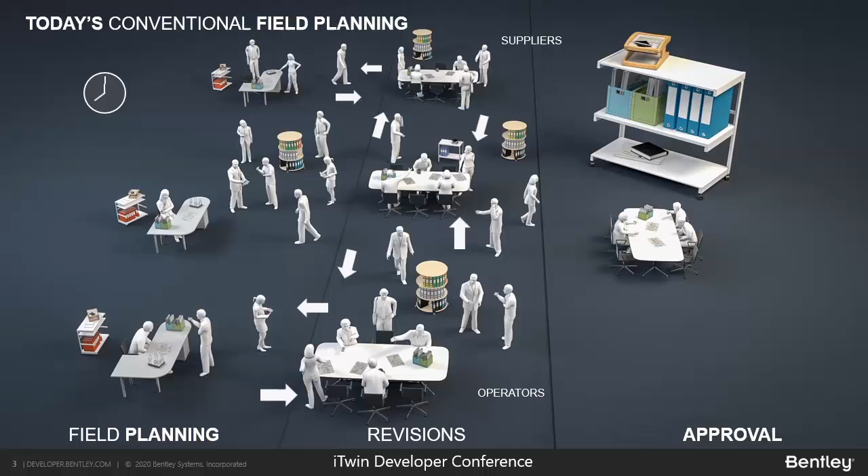Because when we work with our clients in the conventional field planning process, we saw that a lot of meetings are held. A lot of data goes in the form of email attachments, you print them out, you make revisions, you edit them, you meet again. And the time until the approval phase is long.

So what if there was a better way to do that? What if you didn't have to spend two-thirds of your time just gathering data and making sure you have the right data to make decisions? What if you actually could have a collaborative digital way of doing this, to do a much more efficient field planning for any sort of energy project, where the domain experts and the project owners can work together on the same data set and fast track this to the approval phase?

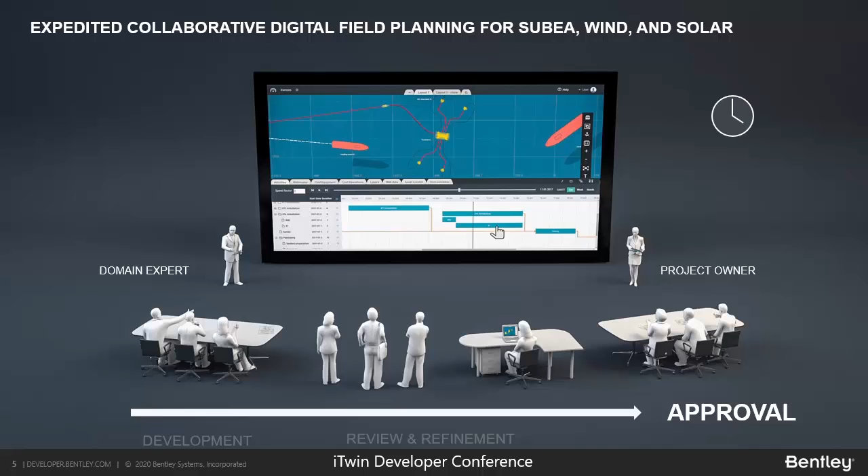And with data always updated and always accessible anywhere at any time, this becomes much more efficient. And if the same data set can also be shared between the different partners in the ecosystem—operators, engineering companies, marine installers, platform contractors—what if they all can collaborate on the same data set to make it much more efficient? So I thought I'd show you a little video on how this works.

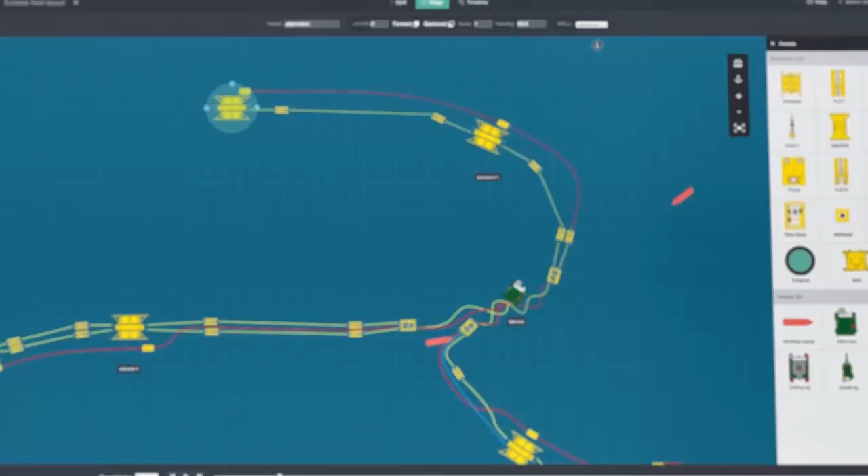So what is FieldTwin? Well, FieldTwin is both software as a service and platform as a service. We're completely cloud agnostic and completely container based. We run in your browser, so there's no installation to be done, and we offer our service on the SaaS side as both a multi and single tenant service. It's available around the clock, around the year. It's very secure, scalable, and reliable. And everything we do is based on open standards, powered by our REST API.

So this is a data-driven design platform, because as I mentioned, data is key for FutureOn. And at the heart is the digital FieldTwin model. This is a generic network topology domain model of your field. Typically this is comprised of descriptions and data storage for pipelines, assets, 3D surfaces, well data, cost data, but also our extensible metadata model that allows you to grow and enrich this model over the life of the field, which can be 20 to 50 years maybe.

So you typically start out by ingesting data. Seabed data, bathymetry or survey data gets ingested and converted into a digital elevation model. You then design your layout using our generic asset library, or if you have your own asset library, you can use that as well. You place out your topside assets and vessels and connect them. You add reservoir scans, you add the well paths, and you can also integrate directly with sensor IoT data if you like.

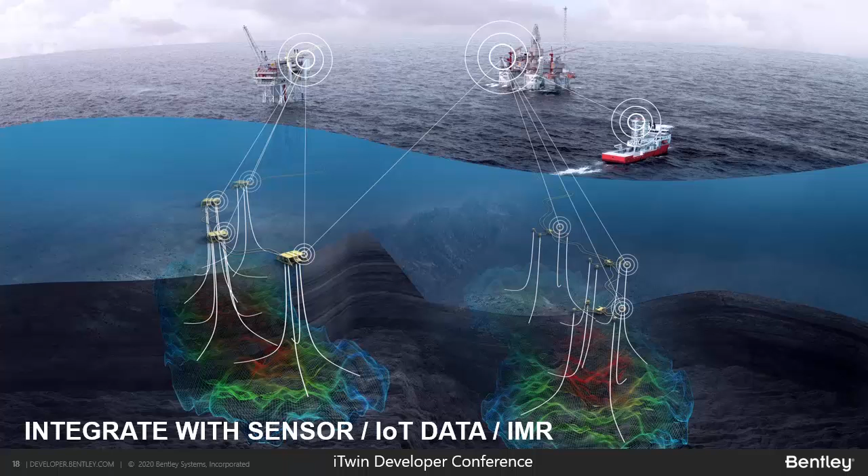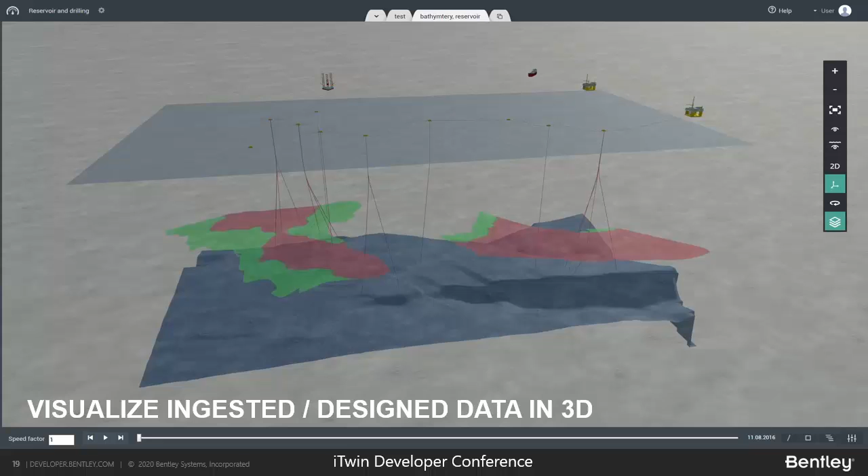And once you've done all this data ingestion, you actually have the design data shown in 2D and in 3D. This is data we got from Equinor, from the Tyrihans field, and from we received the data to it was live and accessible around the world to permitted users, it was 40 minutes. And now everyone could see what was going on from all the different expert domains and collaborate on the same model. And this goes for any sort of energy project, whether it be offshore wind, or it could be solar, or it could be onshore projects.

So metadata, this is another key element. This is where you make the engineering descriptions for what you need in your project. So typically that would be describing the pipelines, it could be the materials, it could be the fluids, it could be cost related. So as you do your design, it updates the costs and also have all the attributes needed to later on run calculations, simulations, analytics as a service, connecting with the platform through the API. And having a single source of truth makes for decision making so much better.

And as you then follow the different phases of the life cycle of the field, which is maybe 30 to 50 years, this data model, this digital field twin grows over time and gets enriched and can follow you all the way to shutdown of the project, the plug and abandonment phase.

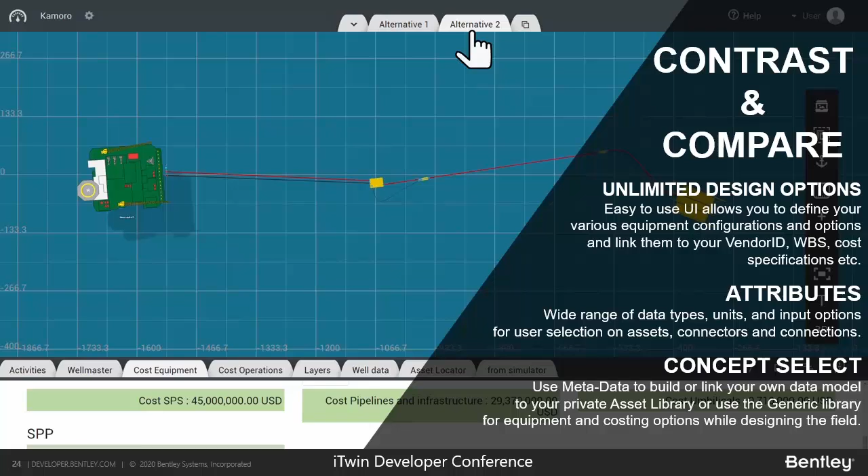One of the key strengths of Field Activity Planner, which runs on FieldTwin, is the ability to create numerous layouts, different concepts if you like. And then you can contrast and compare the cost of these concepts, the CAPEX, the OPEX, or installation time, all to help you narrow that down to maybe one or two concepts that you want to then run engineering calculations, going from pre-engineering to engineered.

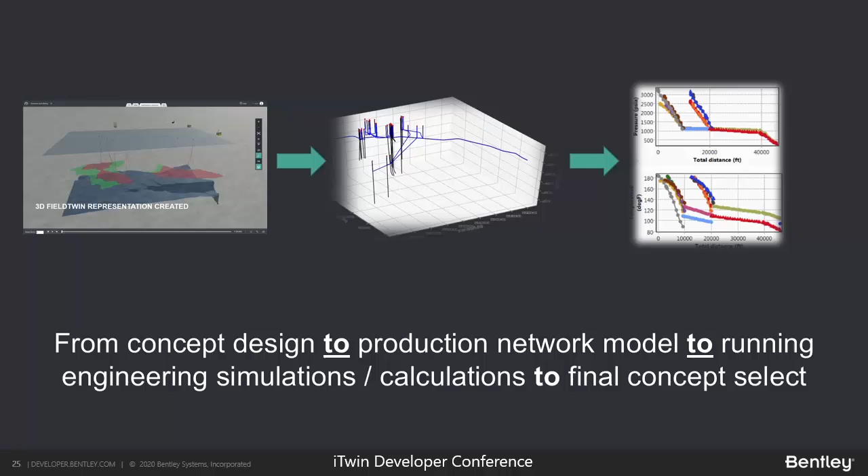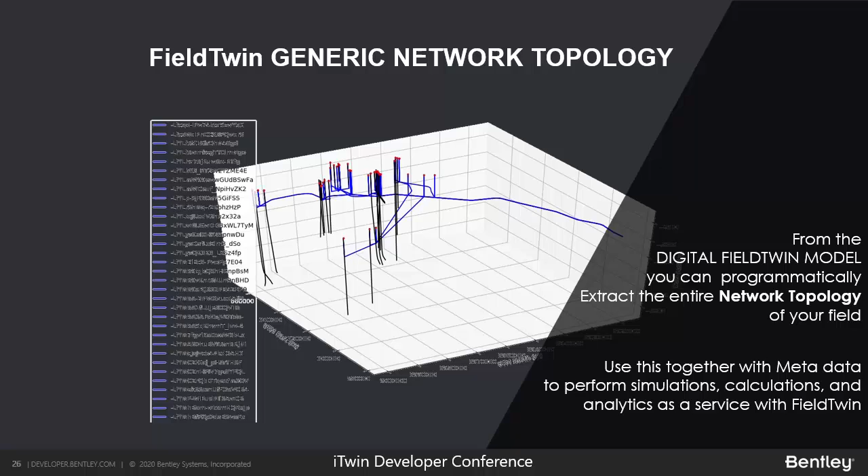And that means concept design, getting you the production network model, and running engineering simulation and calculations, and doing the final concept select. Because at heart, this is a generic network topology that you can access programmatically, and you can integrate all sorts of engineering packages with it. Because we have an API-first architecture, so everything is described in the FieldTwin model and can then be connected to other expert systems. And the API can deal with map sources, sensor data, engineering integration, simulations, backend system, calculations, costing.

But really what's important is also the connectivity with digital twins. So, as I mentioned, everything is accessible through the REST API. You can add, remove, edit metadata. You can actually create or retrieve entire field layouts programmatically using the API. You can get the pipeline and engineering data for the pipeline and run engineering calculations. And most importantly, everything is seamlessly synchronizable with iTwin.

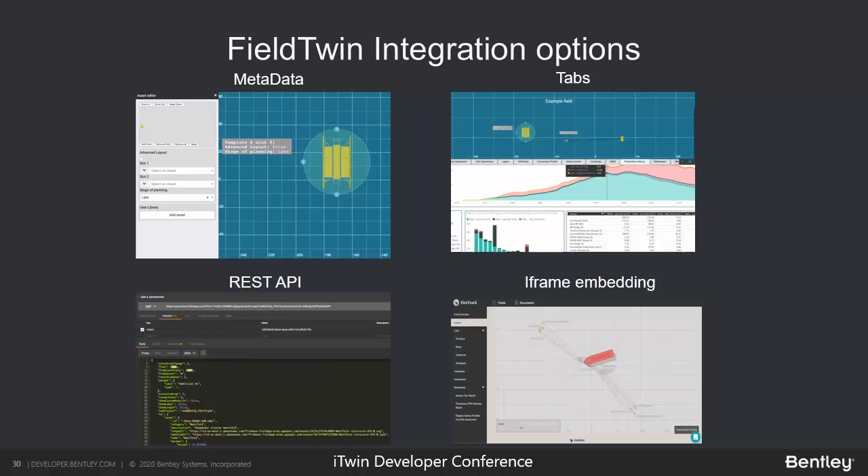So within FieldTwin, you can also embed any sort of tab, which is an iframe, so you can have your KPI dashboard from Power BI. You can also take FieldTwin layouts and embed directly as an iframe in your own applications, or just build on top of our API and create your own solutions with their own UI.

And when it comes to the FieldTwin and iTwin synchronization, this is very powerful because we can ingest a lot of the data used in the energy field layout to get to the design and concept select. In the concept design, you can hook up all sorts of calculators, simulators, engineering services, and then the synchronization brings all this data into the digital twin and enable iTwin workflows.

So that means you have enterprise workflows for review, validation, insights, and any sort of dashboard that you might need. So this enables collaboration across the board, knowledge sharing, better quality of the communication, speeds up the process, has better quality on coordination, and has a digital working environment for everyone. And that means substantial cost savings and reduced time to market, and also better risk management. And again, improved engineering performance also means that you have increased field profitability.

And together, FieldTwin and iTwin, using the iModel bridge, allows this synchronized digital energy domain models for rapid visual iTwin enterprise workflows. Thank you so much for listening.

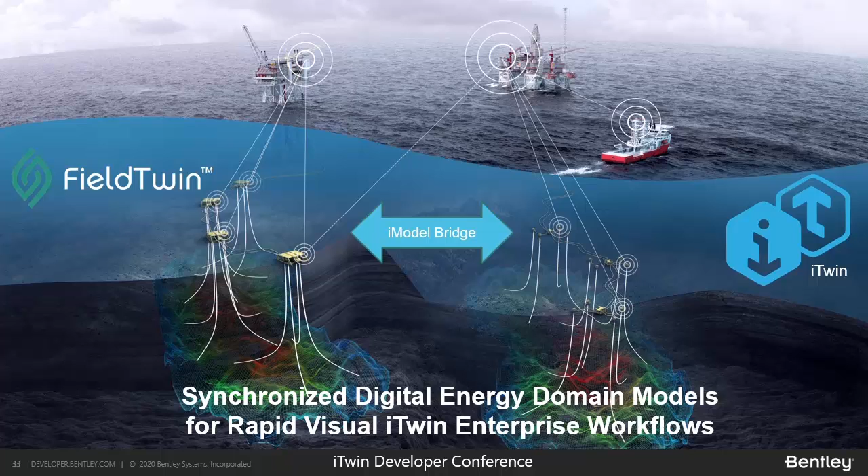We've extracted a 1-minute snippet of Josh's talk to present here for two reasons. First, it makes a great exclamation point to Olav's presentation, letting you hear about the benefits of using FieldTwin with iTwin from an owner-operator's perspective. Secondly, Josh's video showing FutureOn's FieldAP to create design concepts and Bentley's Design Insights to perform cost analysis against them is an ideal lead-in to the next two segments of our presentation, where two developers who worked on the FutureOn connector will shed more light on how that connector works.

Here's Josh. So how much time?

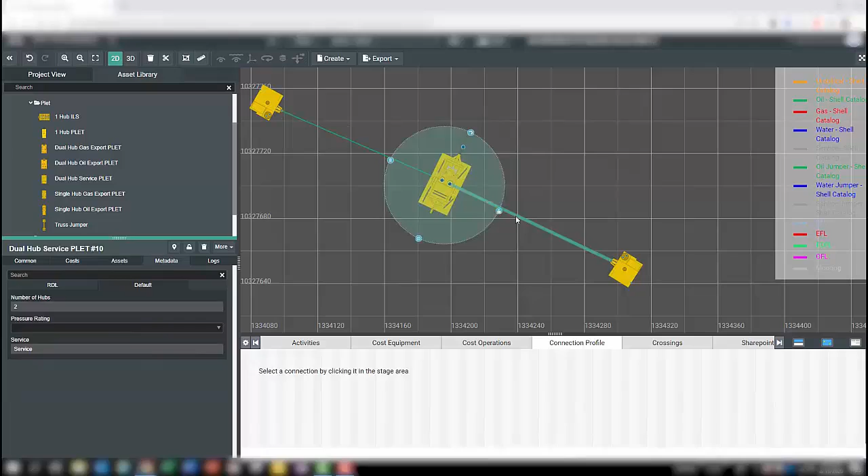We're looking to trigger a roughly 30% reduction in the amount of time it takes us to come up with concepts, select them, and move into the engineering phase. A concept engineer can now take a concept and rough it up in 3 dimensions within this platform, and they can do 2, 3, 6, 10 different concepts within a couple of minutes, as quickly as they could drawing it on a whiteboard or mocking it up on a PowerPoint slide.

The magical aspect of this is that now all of the cost and schedule data is connected to those standard engineering packages in 3 dimensions. So with the click of a button, we're able to identify, calculate, and visualize how all of those different solutions stack up against one another. You'll have professional looking waterfall charts that show the cost and schedule comparisons, and that makes the concept selection process quite simple. What used to take us months to do can now be done live.

Thanks to Josh Etkin and Shell for sharing that demonstration with us. As you saw there, multiple concepts produced in FutureOn's FieldAP browser client became accessible in Bentley's iTwin. Once there, Josh showed the cost evaluation being done using the concept compare feature of Bentley's Design Insights.

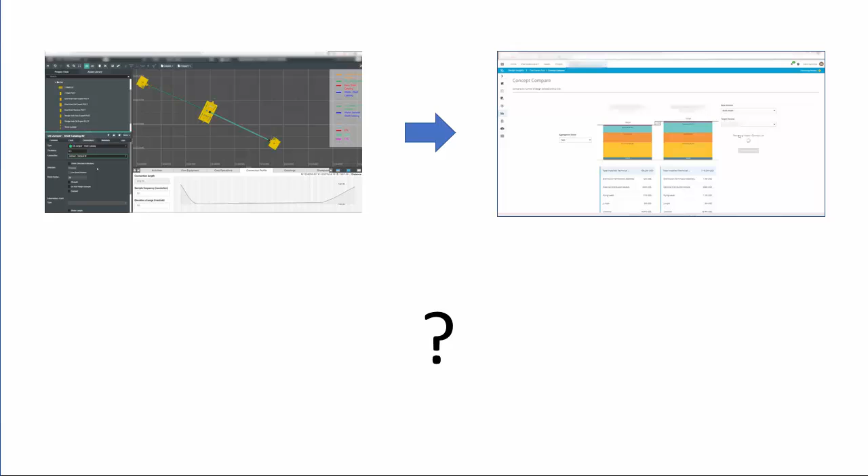But one point that the video glossed over was at what point do the FieldAP concepts actually flow from the FieldTwin over to the iTwin? How is that accomplished? In the next two short segments, Adam McCarthy and Akshay Madhukar will explain when the concept data flows to the iTwin, and once there, cover a few additional things that can be done with it.

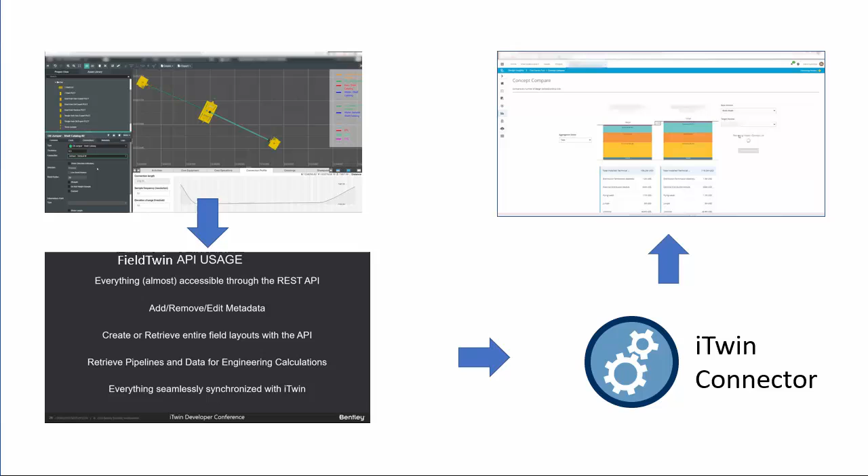My name is Adam McCarthy, and I'm one of the developers for the FutureOn connector here at Bentley. This presentation will just be a quick demonstration of the solution we implemented for going from a FutureOn FieldTwin to creating a Bentley iTwin using the FutureOn connector.

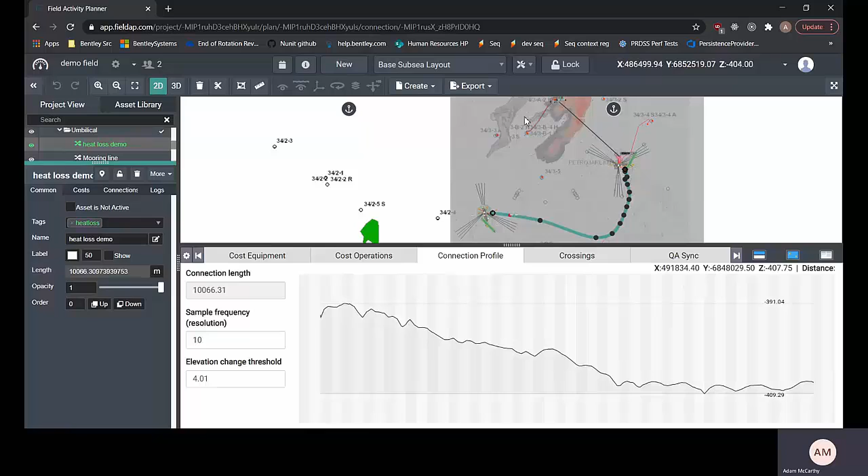This page here is a sample project that we've created inside the FutureOn FieldAP that is modeled and ready to be synchronized into an iTwin. In order to do that, we'll use one of the tabs that Olav mentioned in his presentation earlier, which we've configured to use a small UI that is hosted in Bentley's Instant On service.

I've already configured everything needed to send it off, but all you would need to send it off is a couple of IDs for the Bentley project and model for the twin you want to synchronize to. After you set those values, all you would need to do is click the Synchronize button, which will gather all the data the connector needs from the values configured, and send it off to an API in Bentley's conversion service that will queue a job to launch the FutureOn connector and convert the data.

After you've done this, you'll be able to monitor the progress of the job here, as well as use the links provided to get to a couple of locations in Bentley where you could use the twin we just created. For example, to use the cost and scheduling comparison feature that Josh showed off in his video a few minutes ago.

I'm Akshay Madhukar, a developer working on the FutureOn connector. I'm going to be picking up where Adam left off.

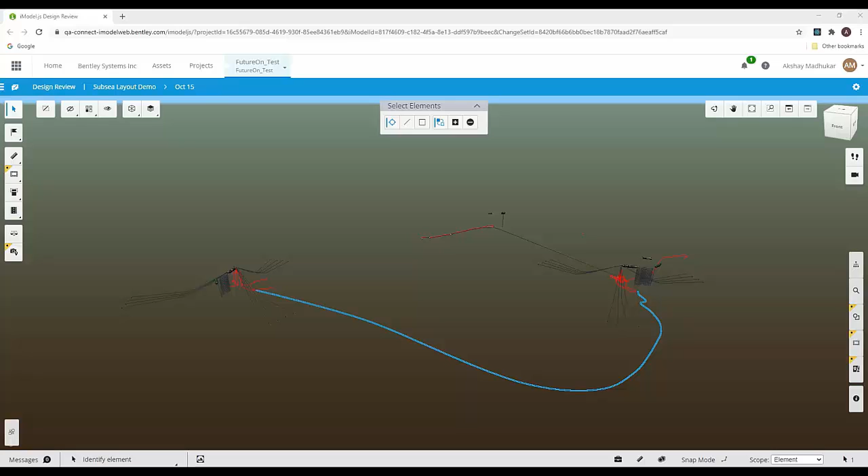Now that we've seen the graphical capabilities of this connector, I want to talk about the benefits of iTwin and the power that it brings.

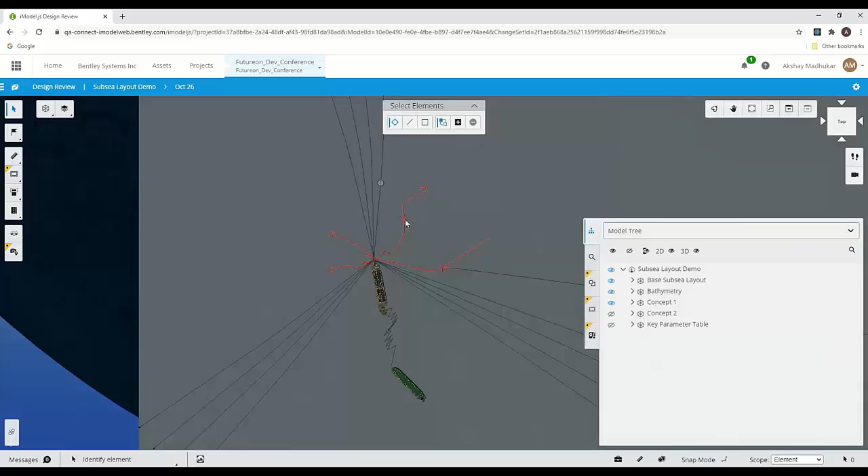The first example I want to show is concept comparison. Within this iTwin, I can quickly and visually see the difference between concepts. In this display, only the base layout is shown. The base layout here is a brown field, meaning it's an already existing field on the seabed. Now I'm going to turn on concept 1, and as you can see, you can easily spot where this concept has been added. And if I switch over to concept 2, you can quickly contrast the two of them.

Another benefit of connectors is that you gain greater flexibility to analyze and query your data. For example, once we have our data in an iTwin, we can run a Power BI connector and gain access to the suite of tools that Power BI brings. Here you can see the iTwin visualizer for Power BI showing the base layout along with the two concepts we saw earlier. Now we can use Power BI to analyze and understand this data.

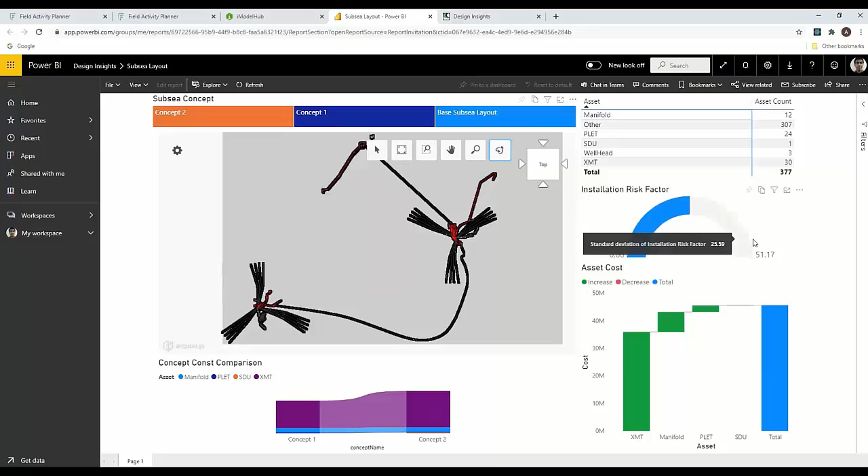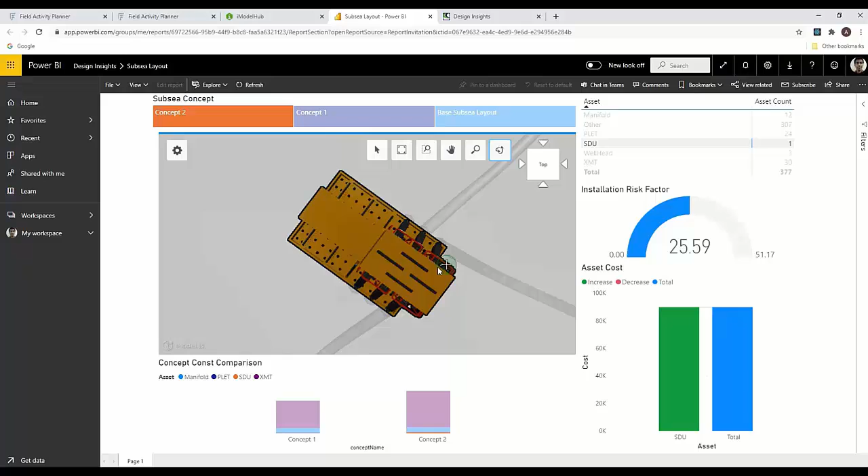This data is completely interactive. If I select, let's say, concept 1, I can see that this change reflects in the iTwin visualizer for Power BI. In fact, I can go further and select individual PLETs or individual units such as this. I can go ahead and interact with this data as I please.

The exciting part of having this data in a Power BI report is that I can bring in other data sources and have them show up alongside the data coming in from the iTwin.

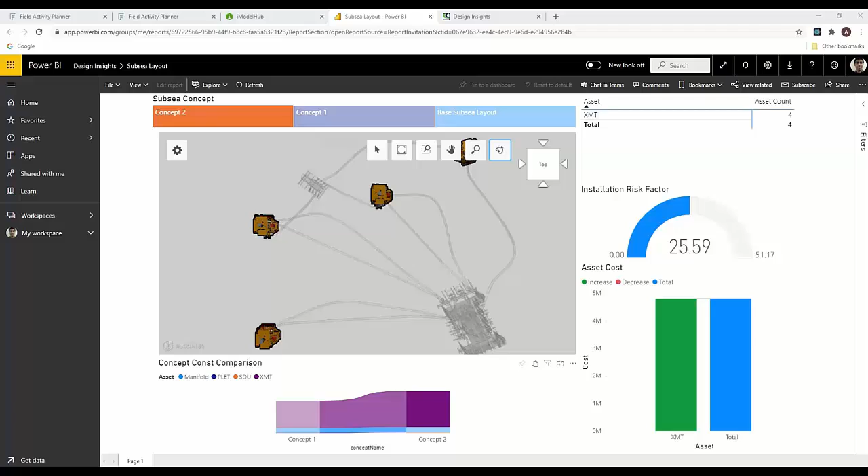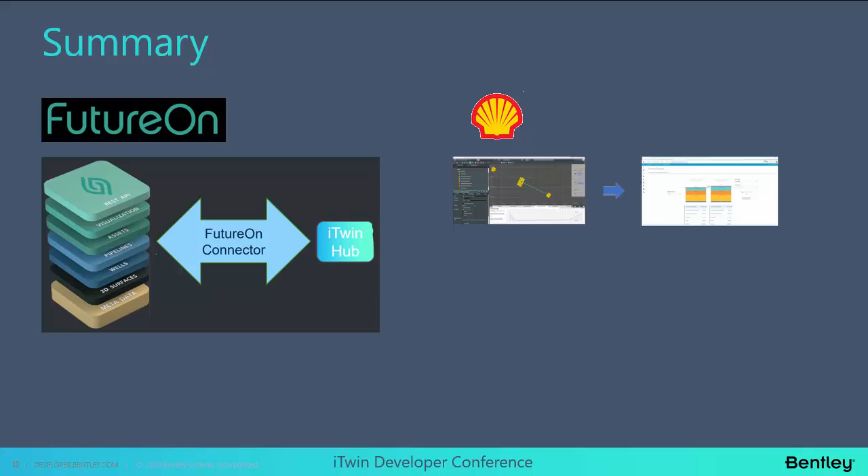Let's summarize where we've been so far. First, Olav Sylthe of FutureOn gave us background information on FieldTwin and FieldApp, and mentioned how the FutureOn connector is used to integrate them with Bentley's iTwin environment. Next, Josh Etkind of Shell helped to ground that integration in terms of stating real benefits that Shell, as an owner-operator, is reaping from this technology integration. Then Adam McCarthy of Bentley dug in a little on how the integration is carried out at a high level, as a synchronization activity implemented in an iframe of FutureOn's FieldApp client.

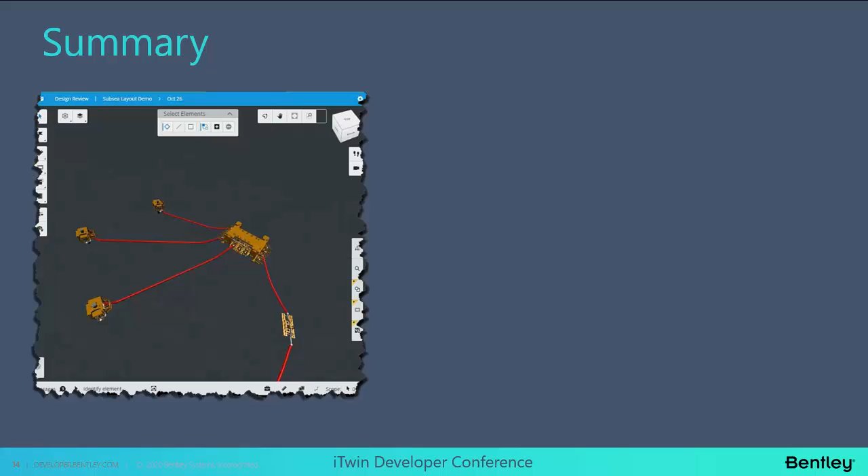And finally, Akshay Madhukar pointed out other ways in which the synchronized data may be consumed, from graphical viewing and design review to report data transmitted through a Power BI connector.